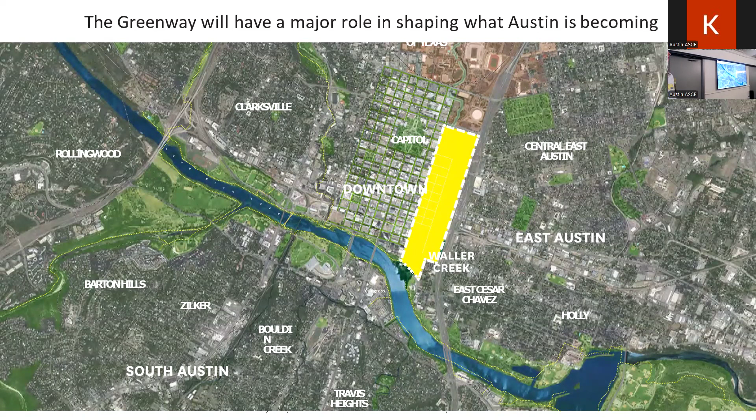I don't think that's the only project, right? There's a lot of pretty interesting projects happening downtown that are all kind of shaping what Austin has become. Recently, the Bridge, Project Connect, Austin Convention Center, I-35 Cap and Stitch, all of them I think are going to be very transformative. It's very, for anybody across the country, Austin's growing like crazy, and it's a really exciting time to be a part of this. It's helping kind of shape what that urban growth is.

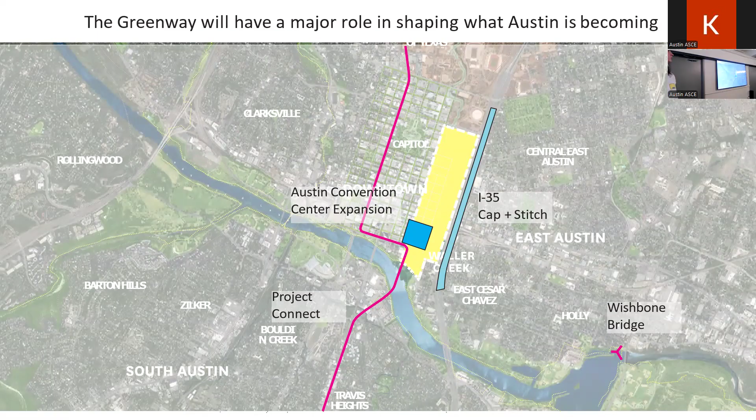Waller Creek, so why is Waller Creek interesting? What are the constraints here? I think you really have to go to the beginning, right? When you have something like a dynamic system, like the creek system, and overlay it with the grid on top of that, you're going to probably run into conflicts over time. One does not necessarily jive with the other one. And then you have Shoal Creek really on the outside. So you can see how Waller Creek, in the beginning, some conflicts may arise.

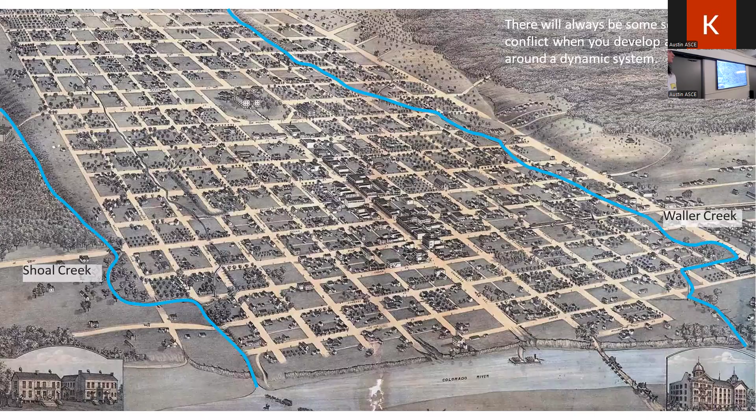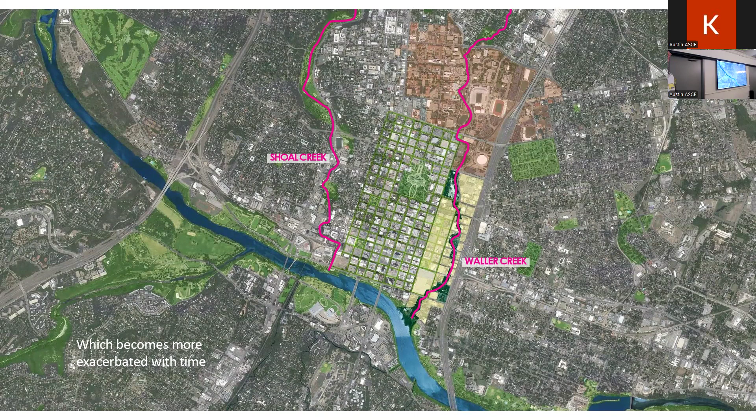In the scheme of the creeks, where Waller actually falls, it's really more in that city center. So even Shoal, like Boggy, all of them, they form concentric circles outward from the city center. Waller really, because of that, is urban, very urban in the city center, it's actually great.

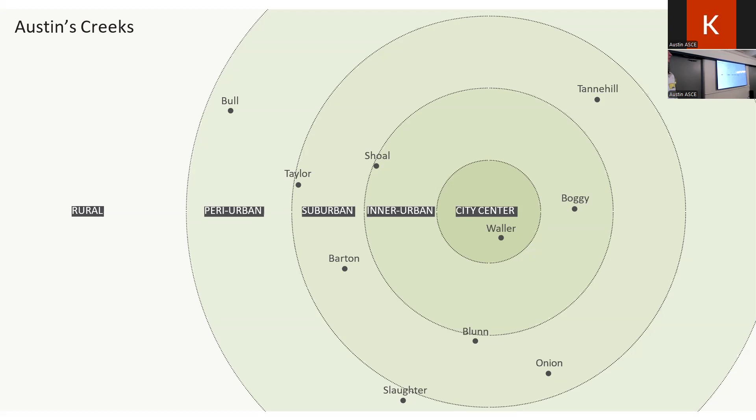It was a pretty deep overall height. A lot of that is due to overland runoff, high point source, a lot of influence into the creek, storm outflows.

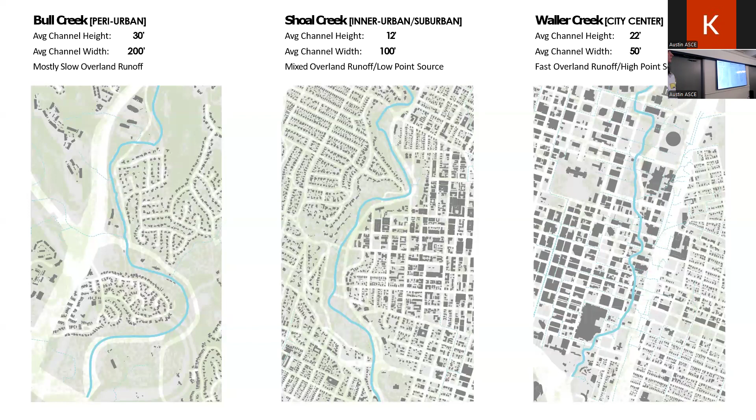In some instances it's great - you go there during the season where it's pretty, it's lush, right? You can have some nice moments there. When that starts fading away, a lot of what's remaining is right there: eroded banks and a lot of structures over time that suffer.

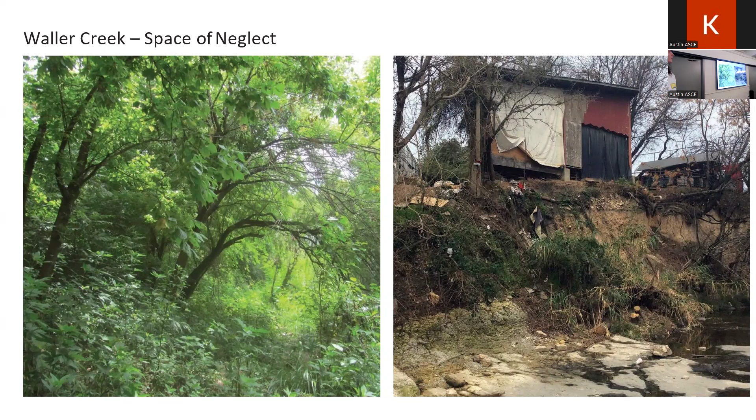And then you also have the exacerbated flood conditions. This is not 100-year events, not by any means, but it's because of how the impervious cover is - you're getting a lot of water moving very quickly through impervious conditions.

Which gives you this, right? You have very eroded banks, you have utilities that at one point had cover over them and no longer have cover over them. You have trees that are kind of the only thing keeping the banks intact. And you have structures that are hanging off the edge.

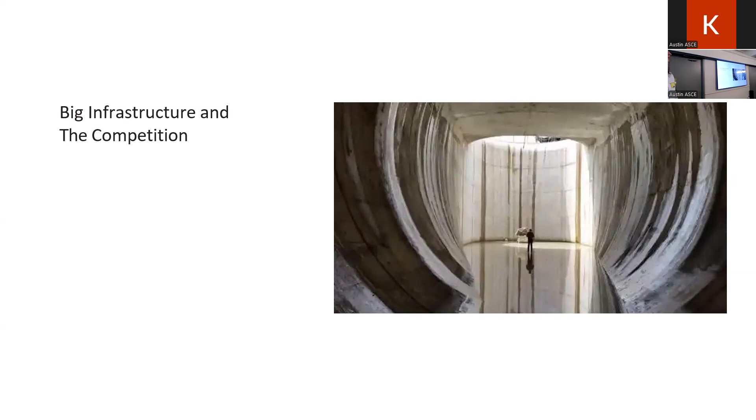Big infrastructure and competition - so this is kind of an overview I'm giving you. I don't know how familiar in general - I know people over there at the project - but big picture, Waller Creek control.

That's been built, we understand what that is, right? That's the headwaters around Waterloo Park and discharging all the way down. We've decided what's along the way. The whole idea is that it activates during a certain level of events, right?

It moves all that water, lifting the area downtown out of that floodplain, making it very easy for project developers. I'm sure a lot of you have worked on developer projects that we've done.

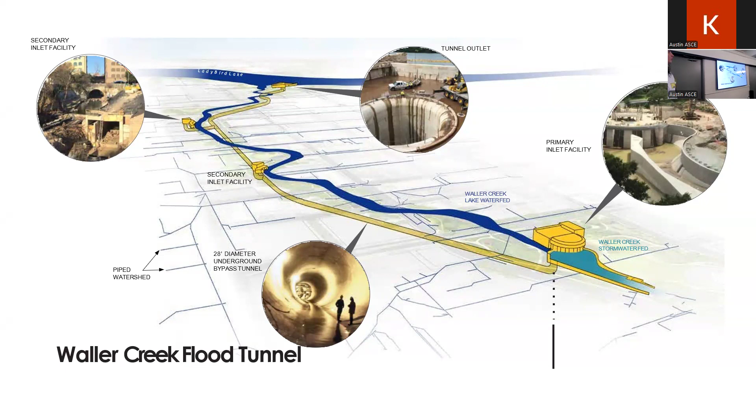So, competition - MVVA won the competition, I believe it was the International Design Competition in 2012, and you can see the creek roughly - the tunnel roughly follows the extent of it. The whole point of the design competition was really, how do you work with this?

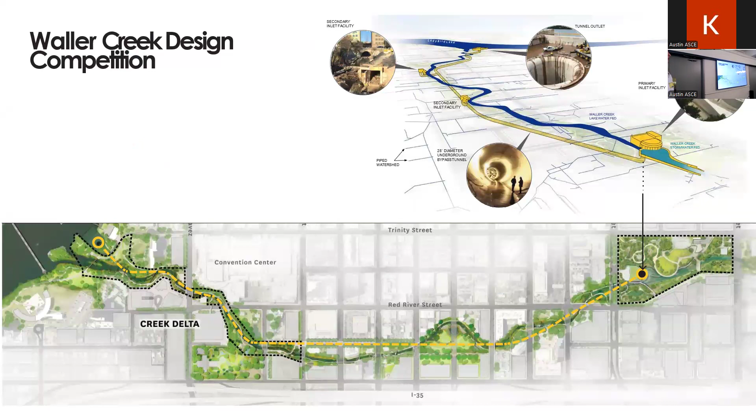So there's spaces, right, and you can't do all this at once because by its very nature, downtown is constrained. It is difficult to have - let's just talk about logistics, construction logistics - where you stage and where you have access to the creek.

You're also thinking about just temporary creek diversion. There's a lot that goes into just building something that may be constrained. So you also think a lot of it has to come down to budget as well. But you get to the project level one.

So the project has been phased. Phase one - Waterloo Park, I'm sure a lot of you have been there. Phase two, the Confluence, which is currently under construction - where I just came from - and it's opening in 2025. It's going well right now.

Then phase three was like - it jumps here, right in the middle, right? That's being scoped right now.

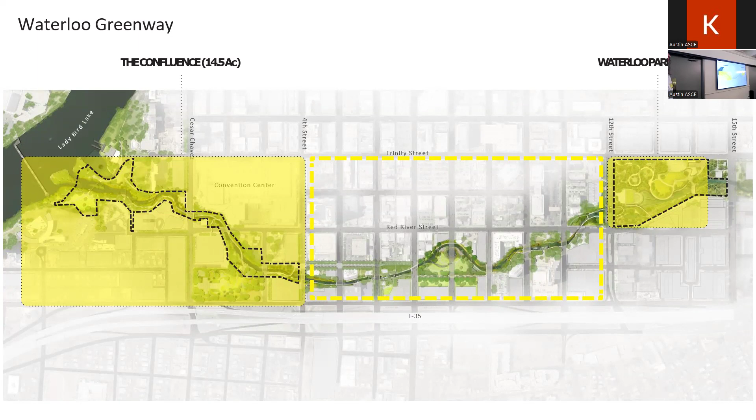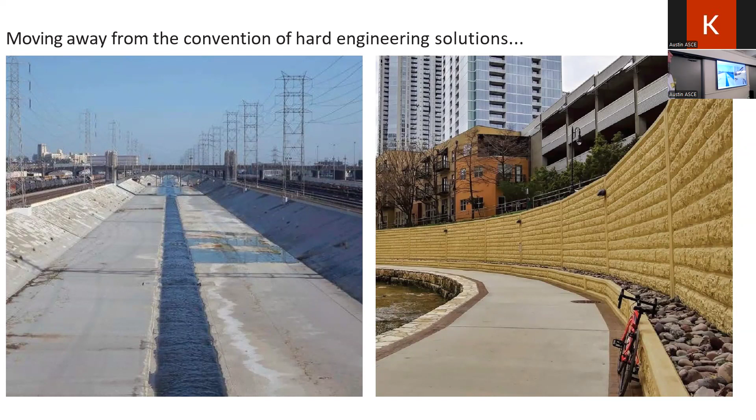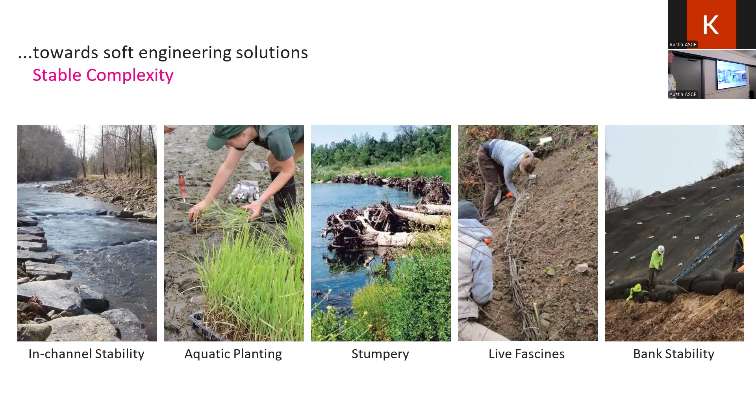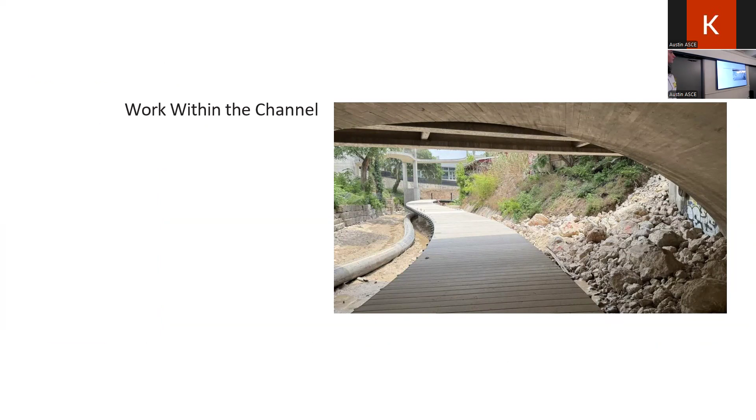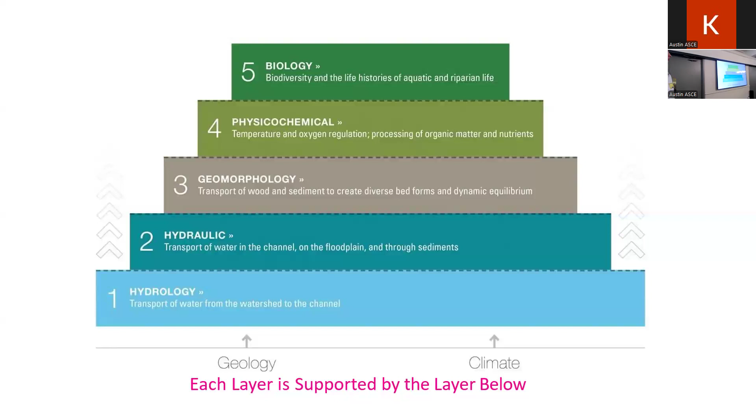At the framework plan, which was the initial planning document after the competition, we had three categories. Preservation - what areas could be preserved and not touched, left as is. Restoration - what areas could essentially be brought back to their previous condition. And then the red, which is reconstruction, because some areas were so constrained they required total reconstruction to help upgrade the condition, improve infrastructure, and recreate that.

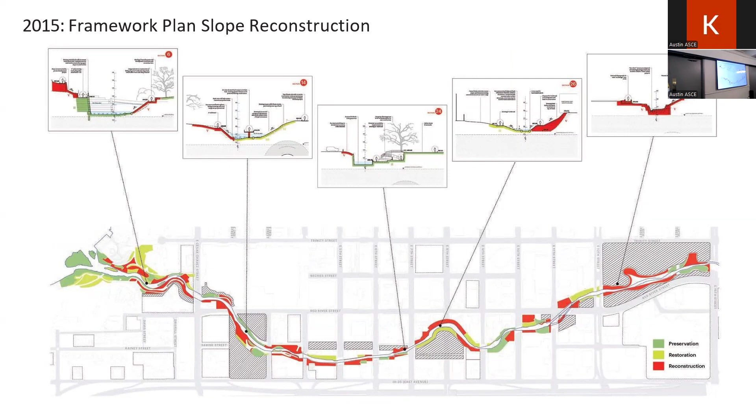So we'd be going from this condition to this - we're kind of building out these slopes. Some of the challenges are there: we don't have a lot of space to work with.

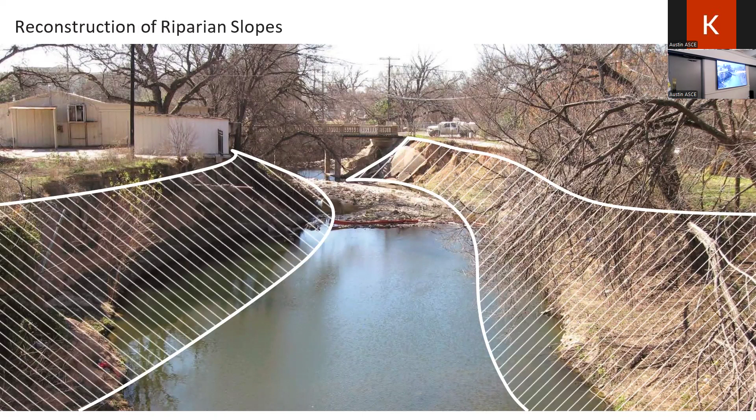So it's like a little cheat sheet. I'm a landscape architect - not so much here, I'm more of a service engineer - but I think where we really thrive is working with everybody, bringing everybody together, and having this really collaborative design discussion.

This is the idea - we have one of these for scour, this is for water velocity. Up to a certain point per second, planting is fine, but as you see increases in flow, bioengineering is needed, and ultimately you can't get away from needing armoring. You want as much planting as possible, but everything else has to be realistic with that. We do cheat that a little bit, and we'll get into how we try to cheat that, which is kind of fun.

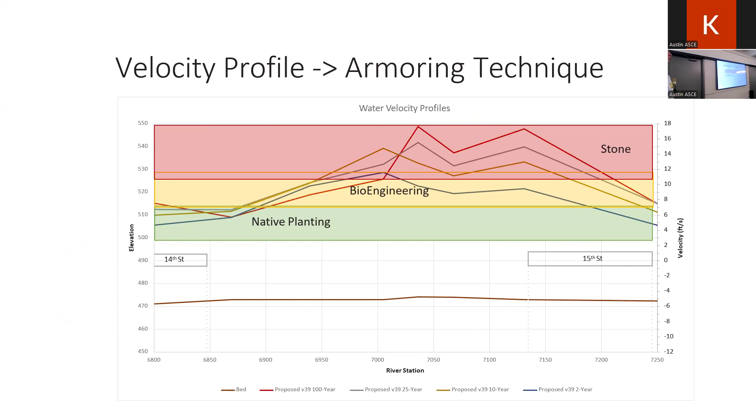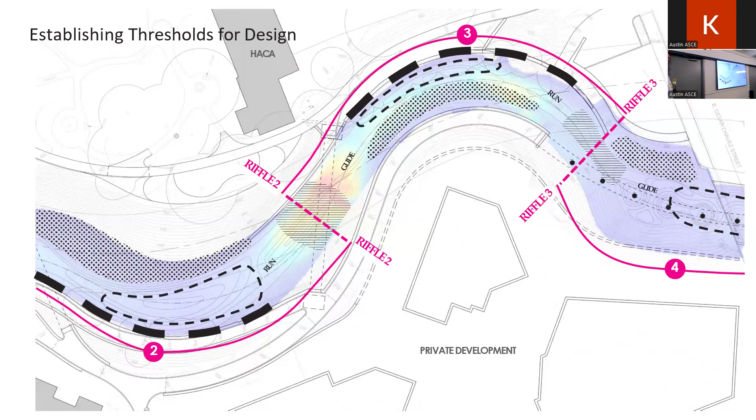We needed to have all this flood edge - you can see here the eco features, there's boulder clusters. And then even to a lesser degree, where we couldn't necessarily incorporate armoring, we have areas here that are TRM, which is just material and how it plays against scour.

But wait, let's open it up - the blue lines are the next round of constraints, which really helped us understand where things fit vertically within the channel. Those are the water surface elevations, again in coordination with the tech.

We have the 10 CFS, which is your baseline right here at the channel - it's the most narrow. Then above that you have your 3-month flow - I'm not going to get into how the tunnel works, but let's just say right now floodplains are contained entirely within the channel, which is incredibly unique. That's all because of the tunnel.

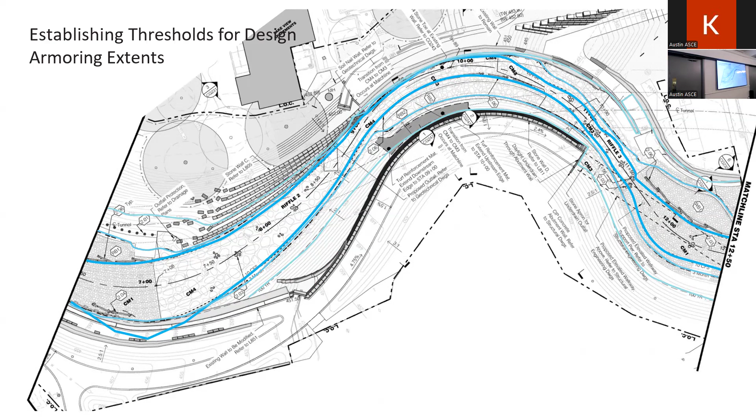So, what does that look like in section? This is where we started kind of teasing out - because in 100 years, Austin actually hasn't had a year like that in quite some time. You could challenge me on that, but this has been something we've looked at this week.

So again, you can see how the armoring responds. I think you have your 10 CFS at the base here - this is your base channel that you're looking at. Here's the flood edge, right here - you can see that's well within the 3-month event.

Bottom line, this is where we started cheating. This is a typical detail of protection using this - just something that's really kind of fascinating, how our armoring in the channel would go up to about that 3-month event.

So ultimately you're going to be armored even during any sort of storm event - you're not going to have anything that destabilizes the channel. That's where your stability is.

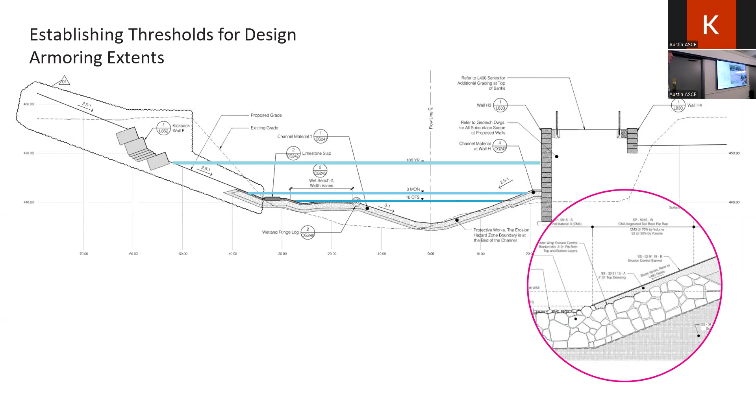But another way we armor is with stone - you can do vertical MSE walls, or of course the standard, typical city blocks.

You can see these are just massive bases - they have beautiful venation in them. It's a bit of a weak point here, but what you're looking at is essentially a 4-ton sandwich with 2-ton slices of bread, just stacked on top of each other. When you stack them like this, they're very stable, except if you turn them upside down - then they can pop apart. But ultimately, they have so much mass that when we have constrained situations, which we do consistently working with infrastructure...

So that's a 66-inch water line that runs this way behind the wall - we can't do MSE, there's no room for it again. So really, looking at these large blocks, they provide us the mass in order to not just support the bank behind it, support the trail above it, and avoid conflict with the 66-inch water line.

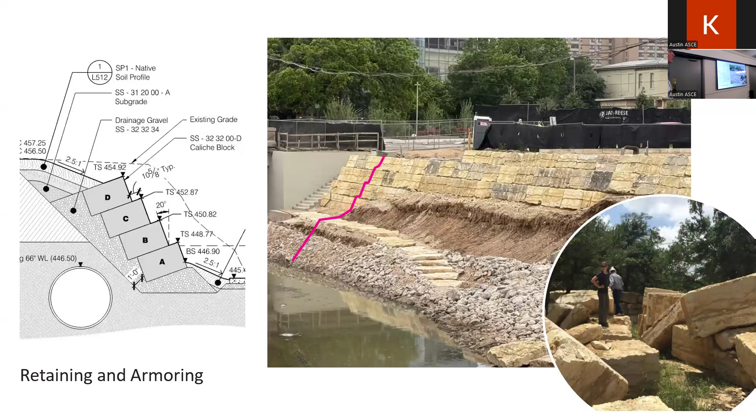But because we're laying it back, we're also working with the channel and the morphology, so we're turning it into an opportunity. In some conditions we're using more standard blocks you'd expect to see around the area, but this particular condition is unique entirely.

Top of bank here, there's a building - again, you can't really have a geotechnical engineer say let's do an MSE wall, it goes all the way back 20, 30 feet into the slope. There's just not real estate there if you're destabilizing the building or whatnot. So we played this game with soil nails and Tecco mesh.

Tecco mesh is that mesh you see on the side of highways, where they drill rock anchors into walls to protect boulders from falling down. That's essentially what Tecco mesh is. We can apply that to the slope, essentially pinning it down with soil nails, which is what's providing slope stability.

And then we came out and built out the channel again, responding to what the geomorphology of the channel would be. This particular one is a fascinating example, because at this end we have existing walls that feather into it. But as you move south, you start moving into this planted corner, so we started splaying the wall out.

The only way to really do that is, here we have MSE that ties back into the Tecco mesh, and we start teasing out the layers of stone so that ultimately the planting comes forward. So you're not looking at a 20-foot vertical wall, you're really looking at more of a planted condition within a wall.

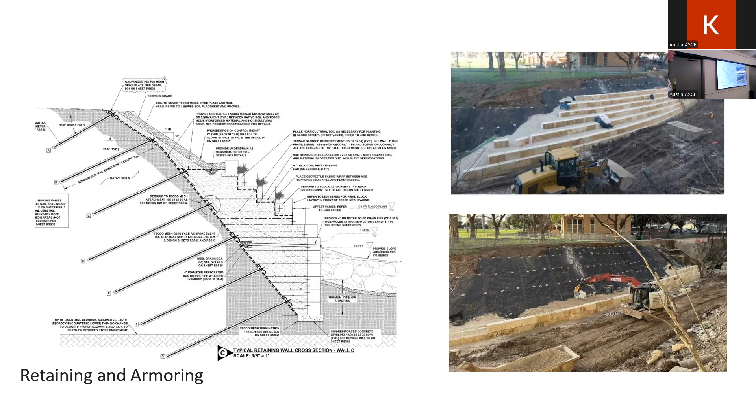You have to look at them, but if you plant some new trees, it's going to look like new trees. So we're also trying to preserve material as much as possible, and trying to keep big opportunities where that could happen again, which is what this is.

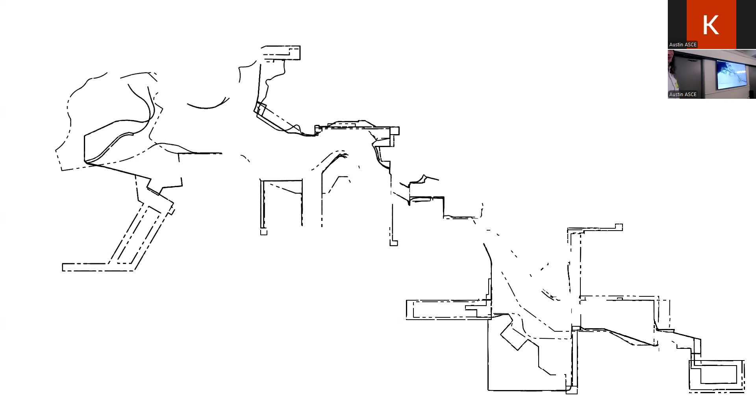The channel design ultimately is the outcome of the project. That was kind of set and understood, how we would be armoring that. It kept coming back -- what are these top of bank conditions? And these would be influenced by a hundred different things.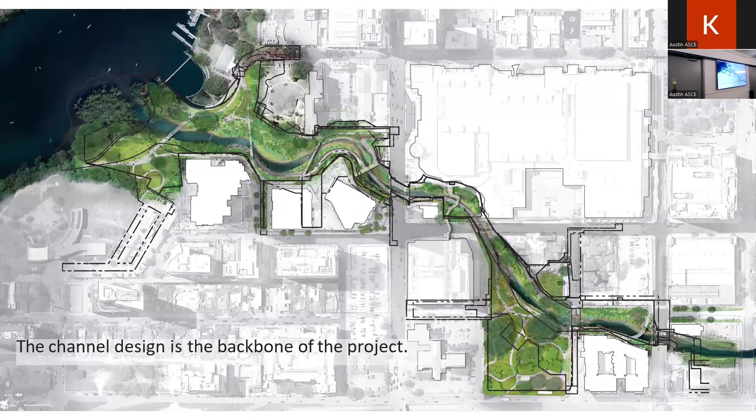Which make this -- the city request might be just providing trail access up to the Rainey Street district, which you're seeing right in the middle here. Or it might be the process duct bank, which is increasing capacity for downtown, with Austin Energy coming in and running their line right under the bridge.

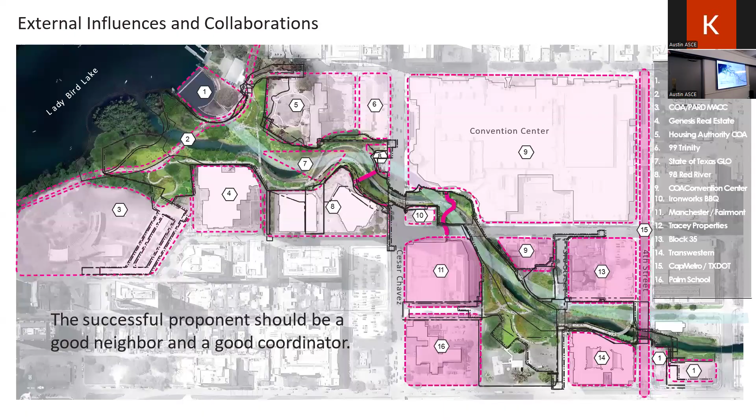I think this is one of my favorites because -- I should be changing limits of work, but this is the limit of work and how it fluctuated. It's not really showing up that good, but let's just say there's two colors there, pink and blue. The limit of work constantly fluctuated even during CDs.

And again, a lot of it's in response to changing development demands, so we want to change the design. I think we understood the infrastructure a little bit more -- where we were currently extending back to, we had to increase it a little bit more because we had to extend our manhole down the line.

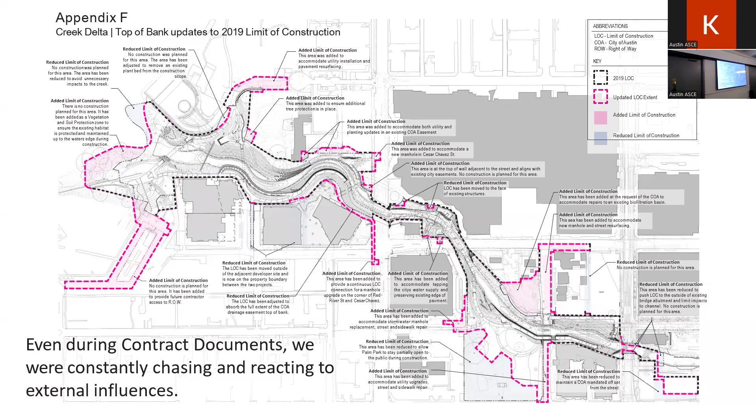This was a constant kind of reshuffling of this perimeter. But ultimately, you have a project that's not in one specific place, but you do have a network that really reinforces the existing city grid and makes connections that weren't previously there.

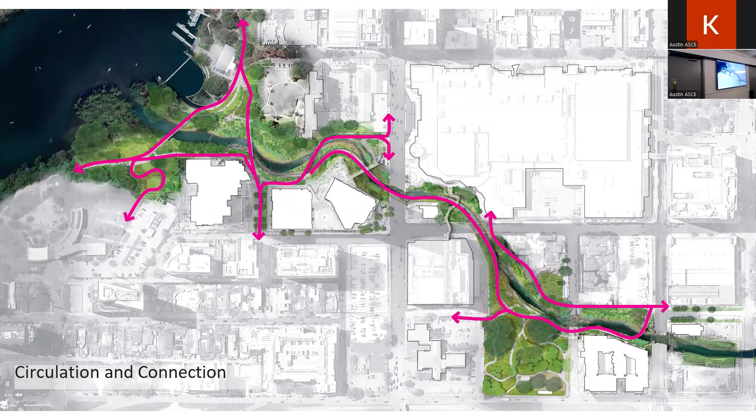What you're looking at here is all of the various connections. Once you're coming off the Butler Trail, how do you get directly to Main Street? There's more direct access now to Cesar Chavez. Down south, you can go all the way to Palm Park very quickly, and so on up to 4th Street, very well connected to the city right here.

All of the materials, everything that we used in this project, was for a reason. I can't stress enough that there's nothing like 'oh, we just like this, we're going to do this.' There's usually a factor beyond that.

Like the main trail material is pervious concrete. One, we like the durability of it. Two, we obviously like that it would help keep water off the trails very quickly. But then also really thinking about some of these bridges and structures and the materials of them - I think both Katie and Logan are going to get into some of these other infrastructural bridge structures, but they really become like the icons.

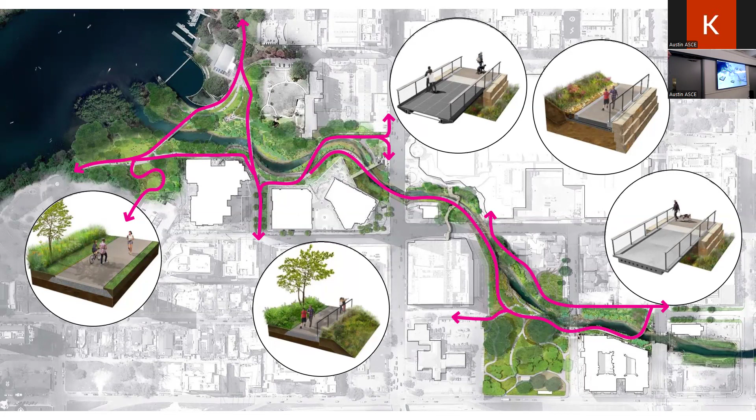And I think this is going to be fun. I decided to take everybody through a general understanding of how complex this project is. This is Cypress Grove - this is 4th Street right here, and it's the creek that runs up through 3rd Street right there.

So this is an early rendering that was done. The bridge itself kind of curves from this point - this is the trail line at Sabine. So you're coming here, you can connect over to 3rd Street, or you can get down so you can begin your journey. So what are the constraints here that really work?

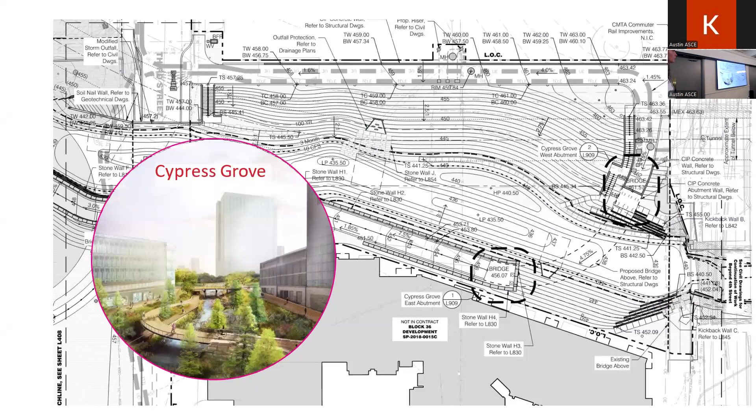The main thing is we're meeting grading existing rail lines, right? Those are rail lines - we don't really have a lot of flexibility, we can't ask them to move that. Change elevation - there's the Armstrong bikeway right of way. Those grades are not as set, so immediately we have to meet those.

How does that relate though to over 3rd Street and also bringing you down into the creek? So some of those constraints we're looking at - obviously we have to meet those existing grades, and also these paths need to be ADA compliant, which unless we're doing a ramp, means under 5%. But then, as you remember before, there are utilities all over the place here, so in addition to ensuring our gradings, we had to really kind of fluctuate where that finished grade was to ensure we had enough cover over the utilities below.

And that's, in a couple of senses here, which you also never see done - because we are doing all the utilities below the ground. Over here, we have a massive, I think it was a 54-inch storm line, which we had to ensure there was coverage above.

And finally, this is a multi-phase project, right? Phase 3 is currently being scoped - it's not there yet, but we still have to be thinking about how these connections work and factors we need to be thinking about there.